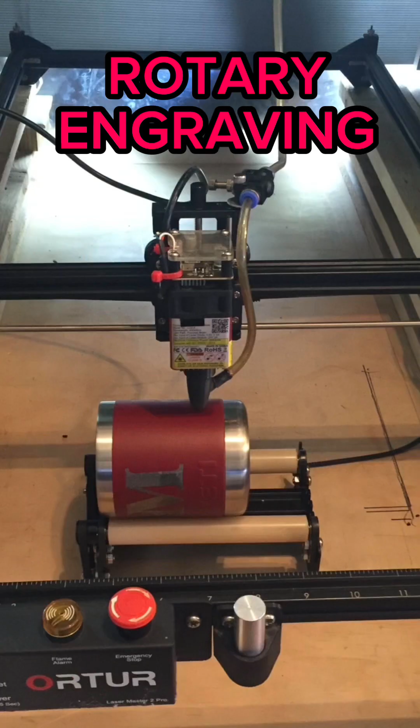Ta-da! Everybody, this is Big Bertha 1.0. You might have remembered from previous videos that I had a smaller enclosure, but I have too many machines. What a problem to have, eh? But when I'm switching them out for particular jobs, because there's particular lasers and stuff that I like to do with each and every one of them, I needed more room.

Okay, let's pause right here just for a sec. So things you need to know before buying a laser engraver. First of all, you want to make sure that they have a website. Buy direct. If you go through a third-party seller, you may not get the support that you need. And that was what I mean by after purchase support. If you have any issues, you want answers to get your machine up and running. The next thing is check to see if your manufacturer is innovative, if upgrades and accessories and tutorial videos are available for you.

Now, I realize some of you have garages that you can use, and that's great. But I'm in Canada, where our average temperature so far this week has been minus 21 degrees Celsius. Even the bunny rabbits are hopping slowly.

My husband had been squirreling away some 2x4s for quite some time, so I decided to borrow them and build myself a new table. Now, eventually, I'd like to cut out this portion and make a platform that would raise and lower, but everything's on a budget, and I need to get back to work.

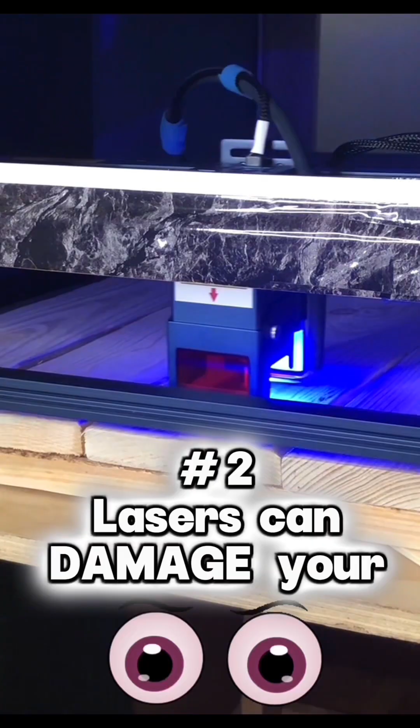So, not only do lasers stink, and you need a good exhaust system for them, they're very harmful for your eyes as well. So, make sure you have proper eye protection, which is another reason why I built a bigger enclosure, because the laser's beam reflects off of surfaces.

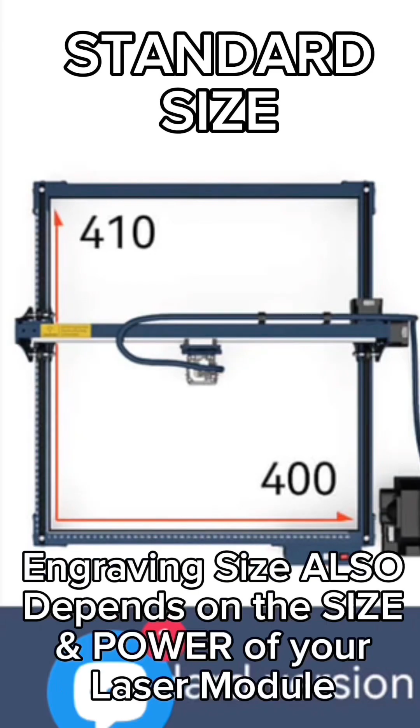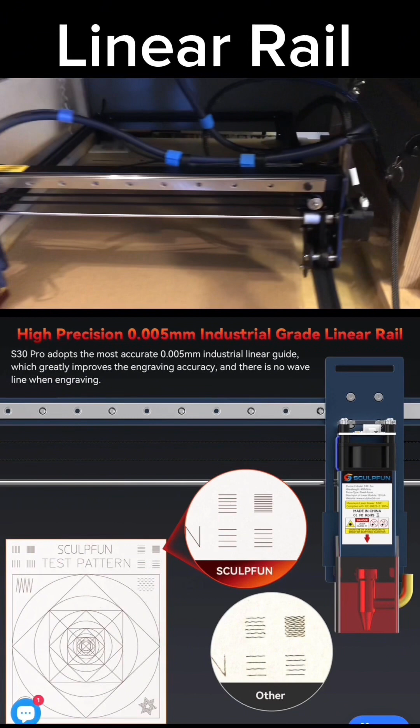Now, Sculpfun had sent me an S30 Pro 10-watt laser with the Y extensions to test out about a year ago. I'm not going to lie, this has been my main workhorse for my sign shop. I am really impressed with the linear rail system that you'll see at the very front of my machine there. With the 10-watt, beautiful, absolutely beautiful detail.

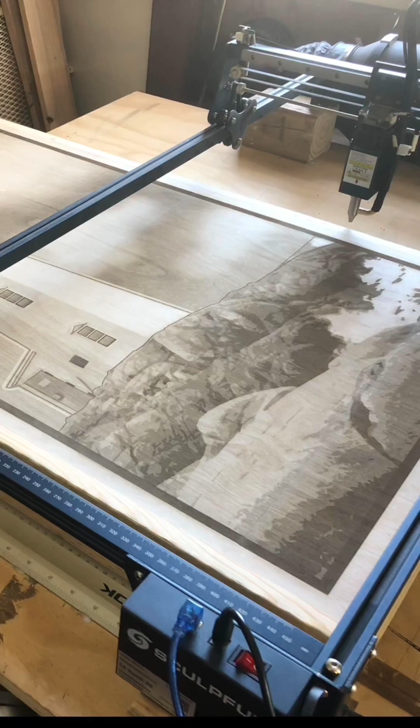So I was a little apprehensive of doing this. I added the XY extensions. So it takes up about 4 foot by 4 foot on my new table. I've just found I've been doing a lot larger projects like cornhole boards, their scoreboards, also 6-foot porch sitters, 6-foot growth charts. So for me, it really was time to extend my machine.

Now you don't have to. I did all of these, well, yes, with the Y extension, but you can do that with the smaller machines. You can check out video 37 on how to tile your artwork in order to do these larger projects.

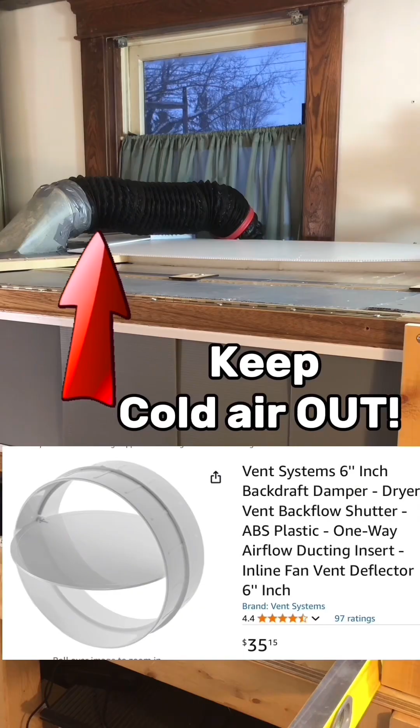So I'm using a 6-inch VIVOSUN air exhaust system, but I've also installed a backdraft damper right in here. So that keeps any of our cold northerly winds out. I have my air exhaust underneath my table, so it doesn't cause any vibration. And it's attached to a board there, and I have a dryer vent system that automatically closes, and there's also screens to keep any birds or rodents from coming into your room.

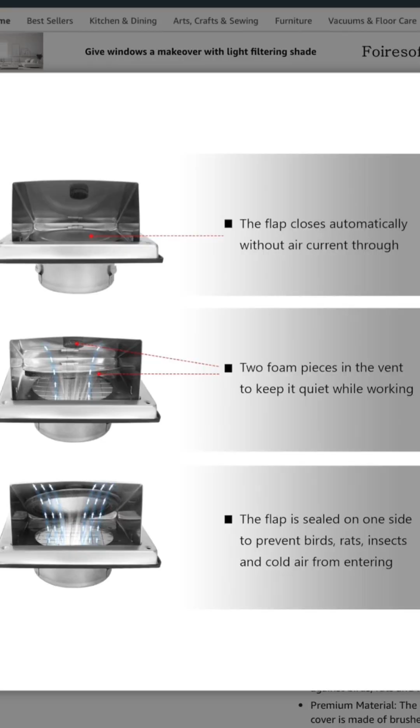So for now, I have lots of room for my extended Sculpfun, and I can switch out any machine to run simultaneously beside it. Eventually, I will have shelves underneath, and they'll each have their own enclosures, so I don't have to switch out on the top surface.

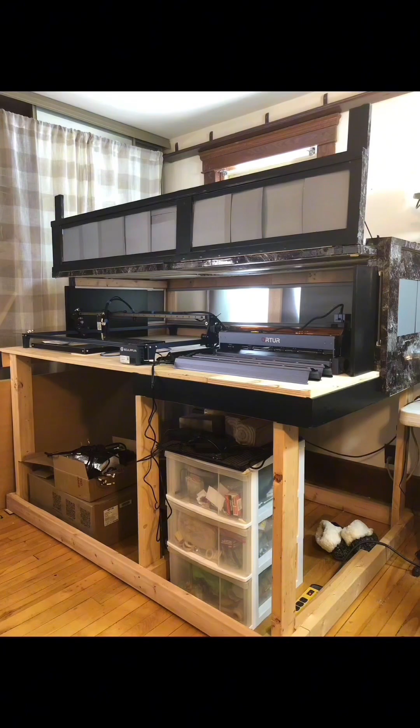So I decided to make it a little more aesthetically pleasing by wrapping it with flat black vinyl because of the laser's reflection. The very front portion will open and close, but it also slides back to give me access to put in larger materials. Same with the side panels. Now this bottom portion here allows for airflow, but I think I'm just going to use a vinyl welding curtain there, and that will give me easy access to any power switches.

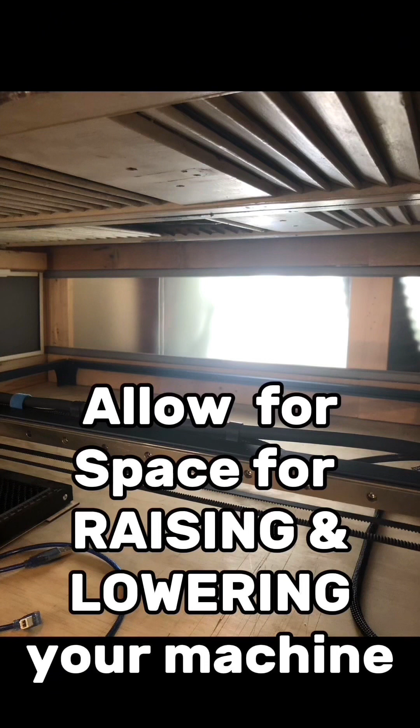So yes, any enclosure cannot be airtight. You have to allow for airflow. And I prefer my airflow to come from the front. Another important thing is to allow for easy access and to allow for raising and lowering your machine. By easy access, for example, on the back of my OLM3 is the YRR rotary switch and plug. So I'm going to need to be able to access that.

Well, I picked the carcass clean of my very first enclosure, and by using the 3mm Coroplast, which is corrugated plastic, and frosted plexiglass at the back to allow light in, I used the J-Track PVC shelf molding.

So I put that along the top and bottom of any access areas that I wanted, and then I measured what height I would have to cut these pieces at and made pieces that I could slide open and closed.

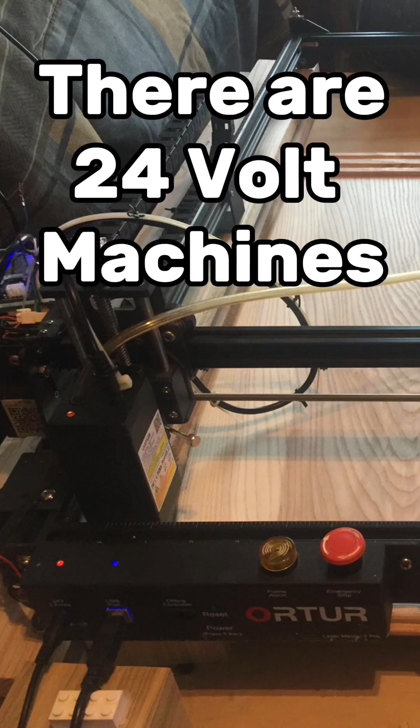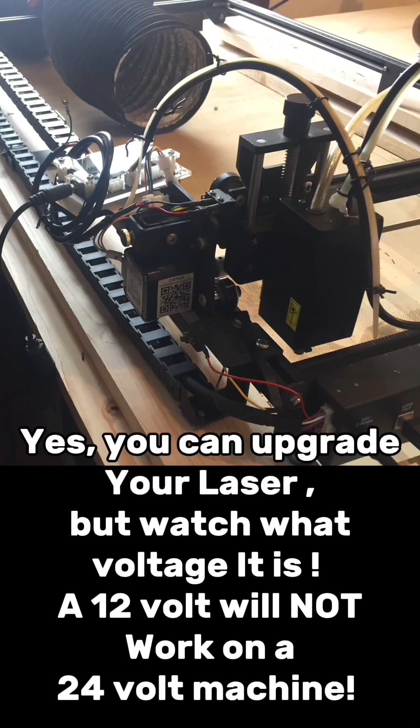Now let's move on to what else you'll need to know about laser engravers. There are 12-volt machines and there are 24-volt machines. There's lots of accessories and modules available to upgrade your machine, but some accessories only work with their brand. They're wired differently or they have different plugs. You can always upgrade your laser, but watch what voltage it is. If it's a 12 volt, it won't work on a 24 volt machine and vice versa.

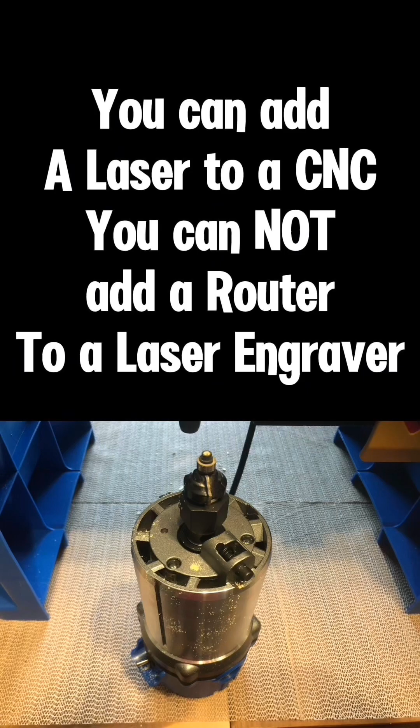You can't add a router to a laser engraver, but you can add a laser to a CNC machine. Laser engravers are just not built strong enough, and they need an automatic Z height adjuster.

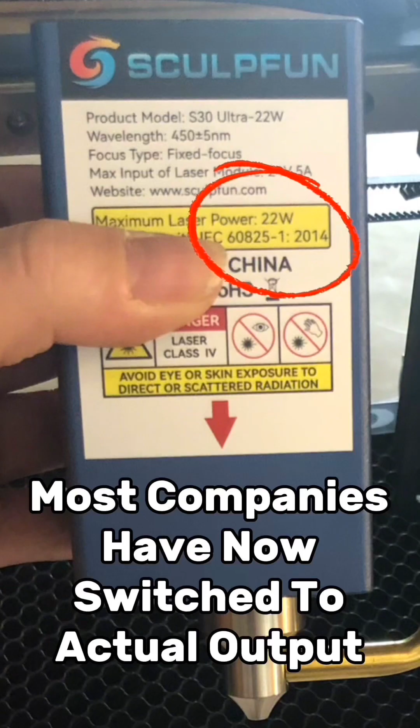Now let's go over laser modules so you guys do not get ripped off. Most companies have now switched to the actual output, but some companies have not, so beware. Some that they advertise as 20 watts are only 1.6 watts, and some that they advertise at 40 watts are only 5.5 output. So it's the output that you're looking for.

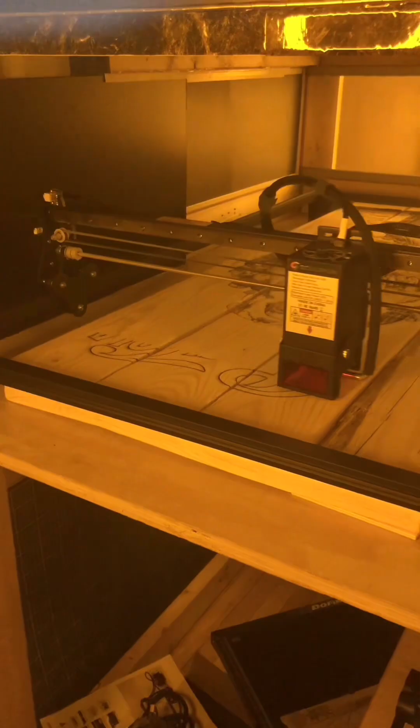Most lasers now boast an engraving speed of about 20,000 millimeters per minute. I've never gone that fast. The fastest I've gone, I think, is 6,000 millimeters per minute. It depends on the type of laser, the power that you have, and the type of material that you have. So don't expect that you're going to be going at 20,000 millimeters a minute right out of the gate.

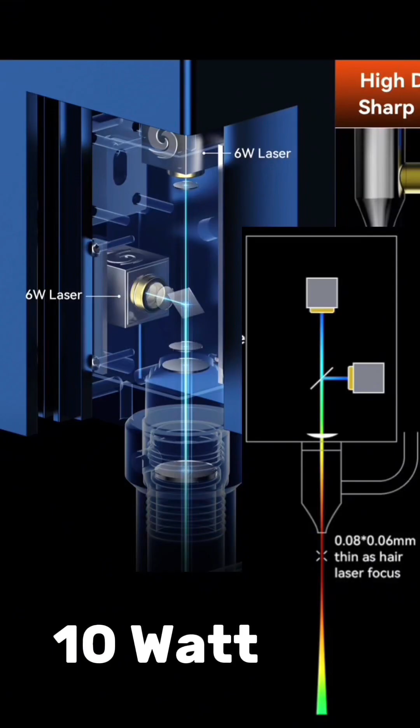Now, this should be included in your laser specifications. For example, a 10 watt has 2 laser modules in it that uses a mirror to focus it into one laser beam. And it should also have the laser focus measurements.

The most common lasers now for sale you'll see are 20 watt and 22 watt, which have 4 laser modules and a mirror to focus that beam. Every time you go up in size, you'll also get a bigger laser beam, which can affect your finer detail. So make sure you're checking what the focal point of that beam is.

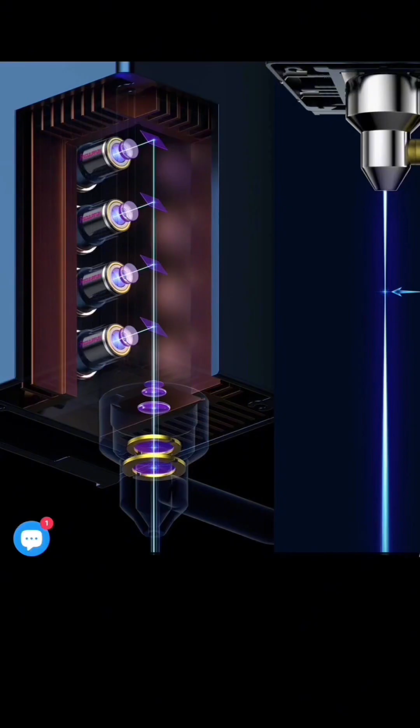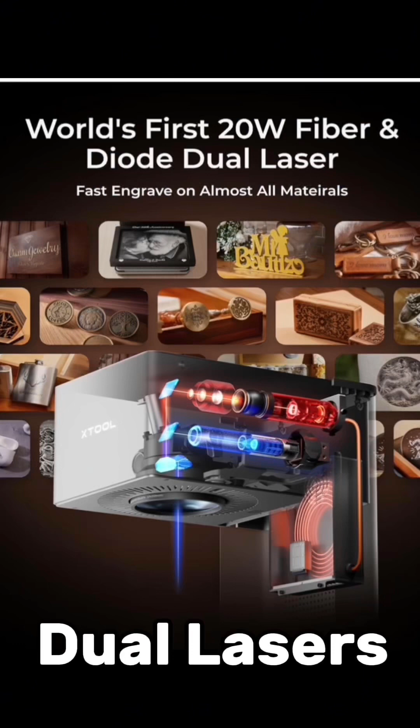Right now is a great time to get a 10 watt machine or a 20 watt machine because they're innovating these lasers all the time. You can get dual power lasers that you can switch from a 20 watt to a 40 watt, or dual lasers with infrared on them as well. Infrareds are used for high-speed marking of metals or plastic, but they can't really cut. So a lot of companies have added infrared lasers that you can add to your machines as well, so you can switch out.

Now, if you're looking for something for higher speed cutting, you may be looking for a CO2 machine. It will engrave much faster than a diode and be able to cut through thicker materials, but it comes with a hefty price tag, and you'll probably have to invest in a water chiller and a few other things. Because CO2 machines come fully enclosed, you may be limited on the size of the material that you want to do.

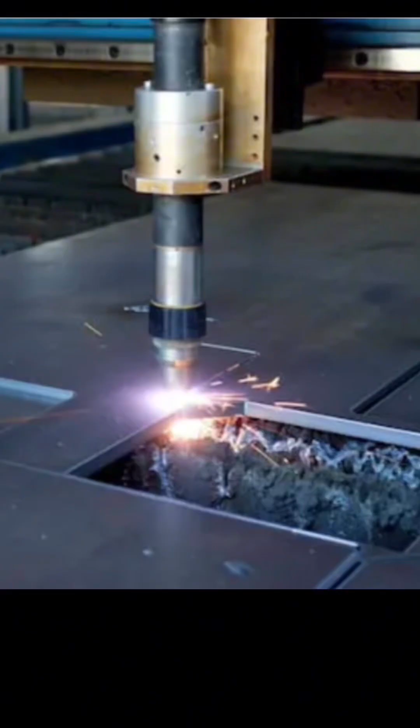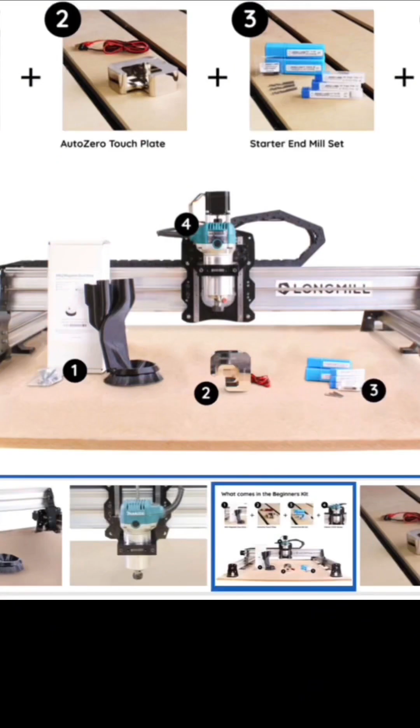If you're looking to be able to cut thick metals, then you'll want to look up plasma cutters. If you're wanting to do deep scoring or cutting very thick material, you're going to be looking for a CNC, which houses a router. So if you decide to go up in power, remember your laser modules are going to get larger as well, so you're going to lose some of that engraving space that you had before.

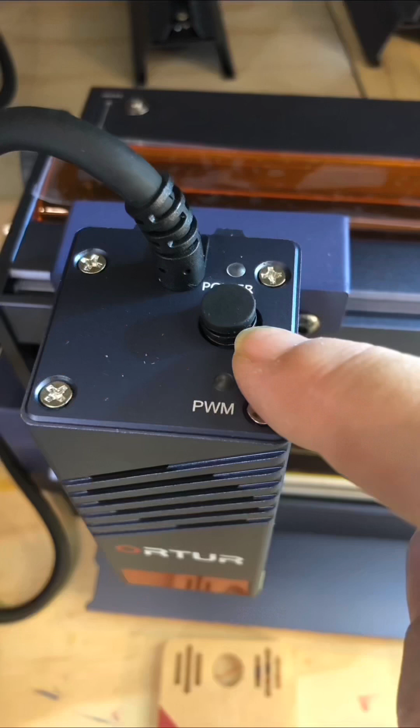So I'm actually upgrading my 12-volt machine to a 24-volt machine. I'm going from a 4-pin plug-in to an MR30 3-pin plug-in. Not all lasers are built the same. Don't think you can get an off-brand and plug it into your machine. You've got to do your research. And this is a whole other type of power plug to a laser module.

And if I pull this rubber cap here, that's the integrated air assist. We're going to go over what air assist is now. I attach an air line to this module by removing this rubber plug, pressing down with 2 fingers and pushing in the air line, and it will lock in place.

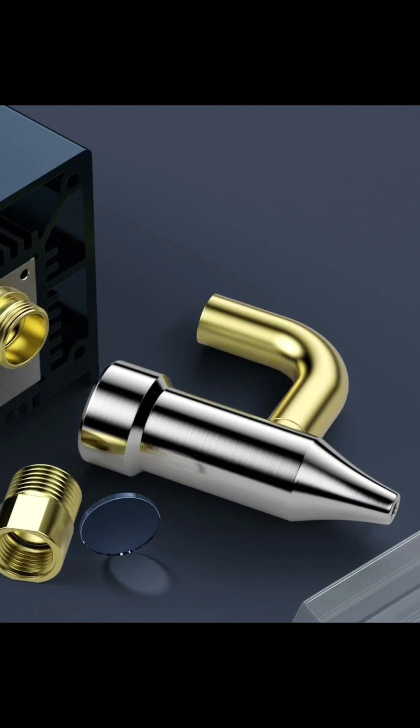Air assist comes pretty standard on laser modules and machines now, but if yours didn't, you are able to buy the tips and modify it yourself to add an airline. Just make sure that any tip you order isn't longer than your focusing tool.

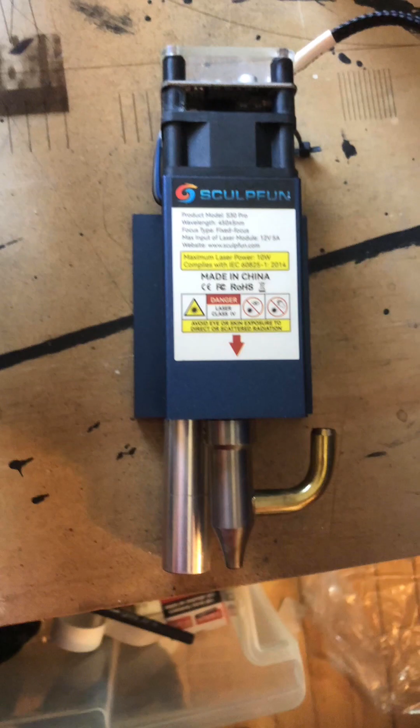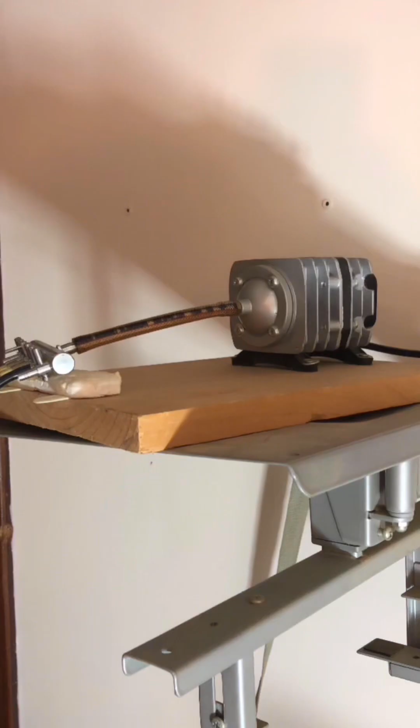So if your machine does not come with a pump, you're going to have to purchase one. And I actually have the aquarium pump, and it came with the splitter regulator manifold that I could do it to a number of machines. And I keep it up and raised off of the table so it doesn't cause any vibration. So you don't want your air pump on your table. It can cause shock sensors to go off or alarms on your machine, and it will stop engraving midway through a project.

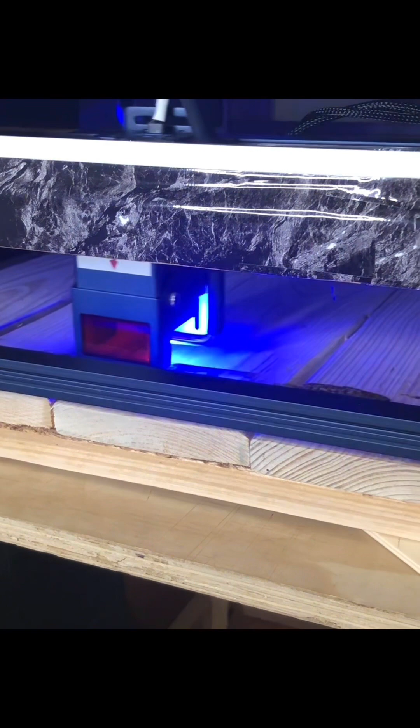I thought I'd share just exactly how loud it can be with the air exhaust, the air assist, and the air fan of the laser module itself. The fan on your laser module itself, its main purpose is to keep your laser cool. So air assist is actually going to help prevent a lot of soot and residue buildup inside the laser module and dirtying your lens.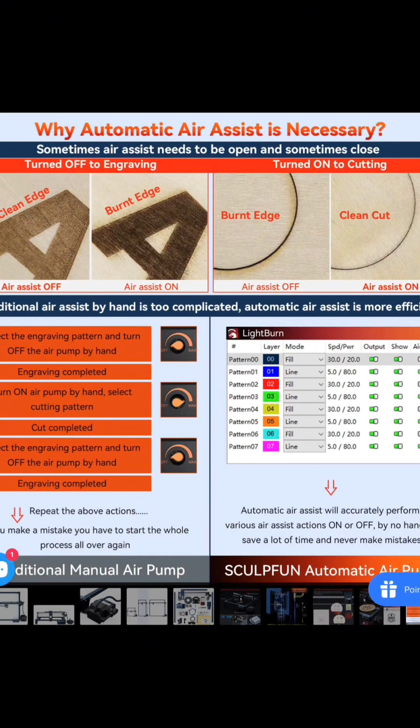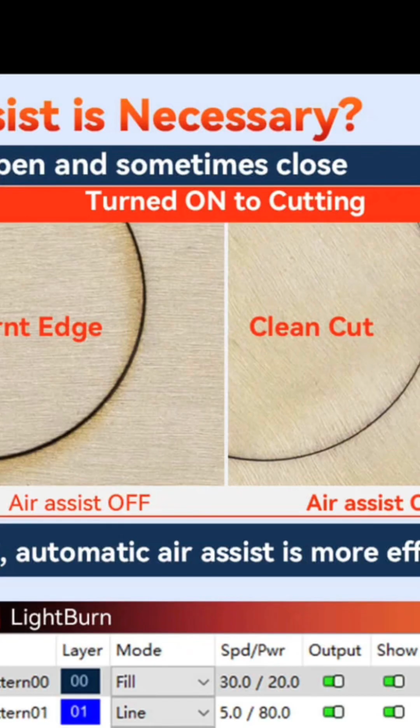Some manufacturers suggest having air assist off when you're engraving and having it on when you're cutting. I actually have it on all the time when I'm engraving and when I'm cutting. Now, I like to do deep and dark engravings. Okay, so the air assist is going to help keep that soot from building up on the tip while I'm engraving. It's also going to move the soot out of the way on the material.

If you plan on doing MDF, it's the worst material you could ever do, but there's a lot of soot and smoke generated by it. So that's again why you're using an air exhaust to take out the smoke, because smoke can defocus a laser.

Charring and scorching is actually controlled with the power of the laser, at what power you are engraving or cutting at, or the amount of passes that you're using. For example, I went at 2000 millimeters per minute at 95% power of my 10-watt module. And that's just showing that with a little bit of sanding, you can get rid of that charring and scorching, and it'll bring out the detail of your engravings even better.

So I like to sand with an orbital sander and with 120 grit sandpaper, or even sometimes 220 grit sandpaper, about half speed, because you don't want to take too much of your top layer off. And then I like to just give that a little blowout with my air compressor and little gun there.

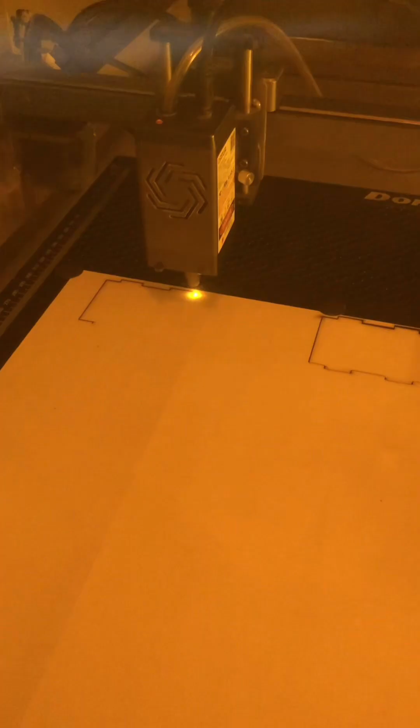Air assist is crucial if you're going to do cutting, because you are using a constant power mode of your laser module for cutting. The air assist is going to actually help snuff out any possible fires and allows airflow for cleaner cuts, but never, ever leave your laser unattended. Now here I'm showing you a honeycomb board and my material is fastened down. I have another video all on cutting. We won't get into too much of that today.

And air assist is crucial to make sure your lenses stay clean. Some lasers actually have two lenses. One's located at the bottom of the laser module, and some come with dust lenses that are integrated into your air assist nozzle. You're going to need to clean your laser lenses often, especially after a big engraving job, before a big engraving job, or before cutting.

You're going to see less power from your laser because of the soot buildup on the lens or even in the fan. So you can actually use an air can to blow out your laser module itself. You want to keep that nice and clean and keep it from overheating.

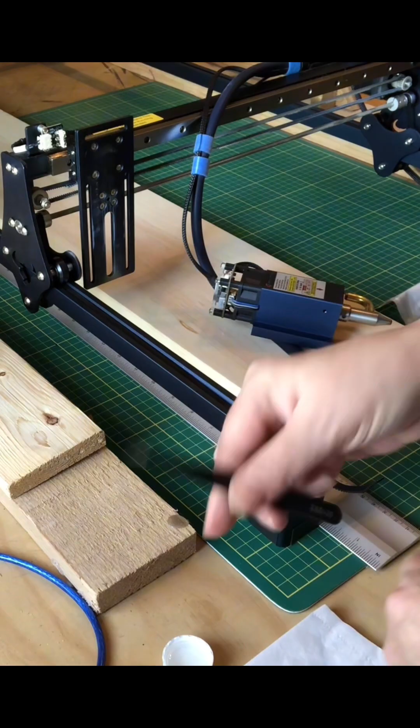Most lasers come with extra lenses right now or extra dust lenses, and you'll get gaskets as well. Now, I do suggest ordering extra to have on hand. If there's a speck of dirt on your laser lens or you haven't cleaned the soot off properly, you're not allowing the laser beam to go through the lens properly, and it can crack your lens. So you may have a long wait from overseas, and then you're going to have too long a downtime.

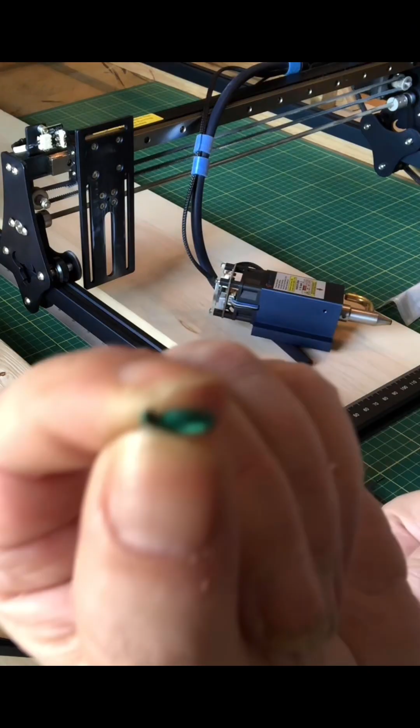And I'm just showing you here that I fried one of my gaskets that covers one of my dust lenses in the air assist nozzle itself. It decided to flip up as I was twisting the nozzle back on. So it blocked the laser lens. I didn't have any laser coming through at all. And then there was a big flash of light because it fried my gasket there. So take care when you're reassembling your laser.

So I am going to speed up this part here. So you'll use their little tool just to loosen off that screw. And that's what really holds it on. When you twist it back on, you're not going to twist it super tight because you don't want to squish that green gasket.

Okay, so you'll just do it to where the air line needs to be on the right hand side. Okay, not super tight. And then you'll use that screw to tighten it. So here's the bottom lens of the module. So the kit comes with a wrench to be able to take that off.

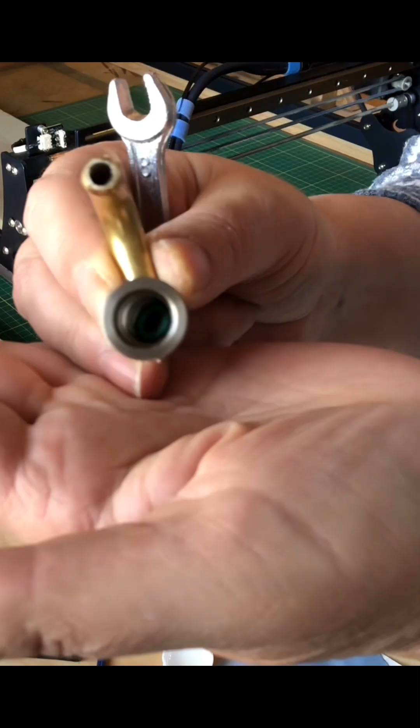I'm going to remove this piece here. So this is what I classify as a piece for the air nozzle. It has the dust lens inside of it. And then there's a lens at the bottom of the laser itself. And in here is where that pesky little green gasket has to sit to give an airtight seal. So when it flipped up and blocked the laser beam, it actually burnt through the gasket and actually burnt my dust lens. So it cost me a dust lens as well.

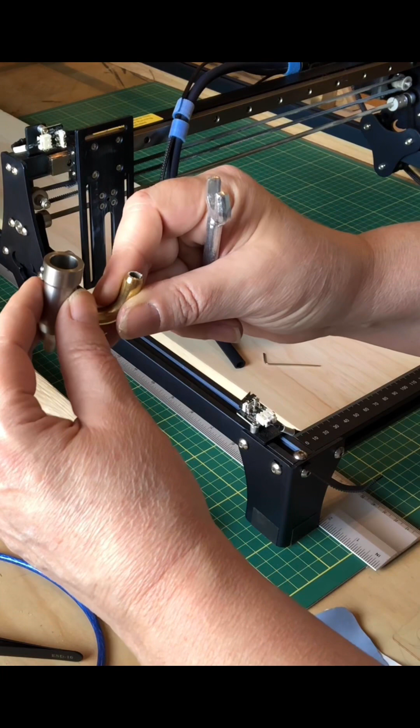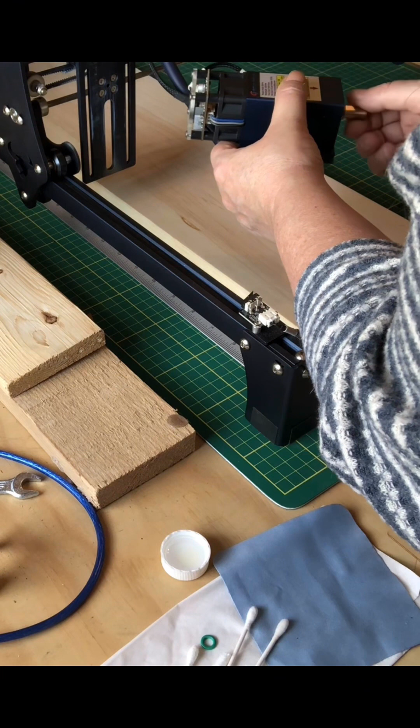So take your time. I've taken some rubbing alcohol and poured it into the cap. And now I'm just going to take a Q-tip, dip that into the rubbing alcohol, and using the tip with the rubbing alcohol, wipe both sides of the lenses, and then take the clean, dry tip and gently wipe any residue. Okay, so do both sides and then do the bottom of the laser and make sure to clean out the nozzle as well. It may have some soot buildup.

Now you hardly saw any residue on the Q-tip of the lens that I cleaned, but look what I pull out of the air assist nozzle itself. So that's why air assist is crucial. It's going to keep your lenses clean and it's going to extend the life of your laser module. So make sure you get that little green gasket sitting flat. Maybe take some tweezers if you have to make sure that that is in there perfectly flat.

And then holding the laser upright. Okay, if it slips on you a little bit, just start again. Make sure the gasket's still in the same spot. Okay, so you're just going to screw that on until you start to feel it slightly tighten. I'm not doing it very tight at all because we don't want to squish that gasket. And then you're going to feel where it wants to stop on its own.

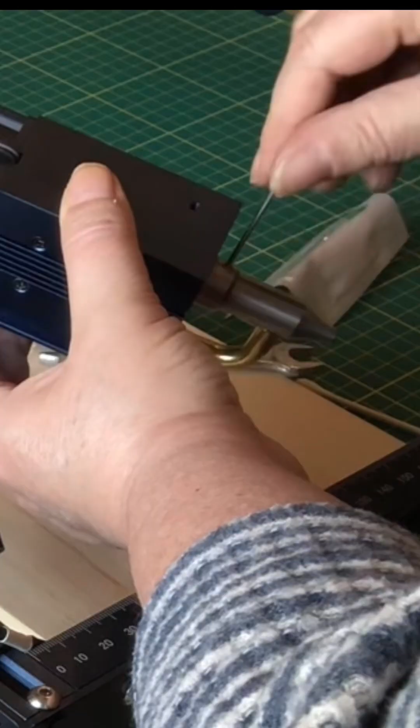So it still may be a little loose, but we're just going to take that nozzle to the right-hand side. Okay, so it's going to be the fixing screw that goes to the left-hand side of that nozzle that really holds it into place tightly. And tighten that all up, and you're all good to go to put it back on your laser machine.

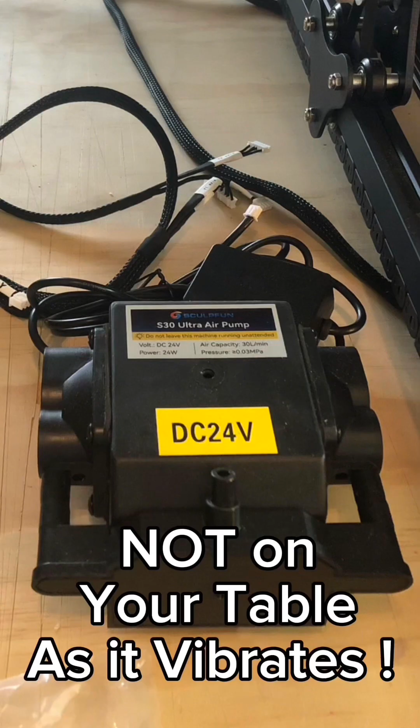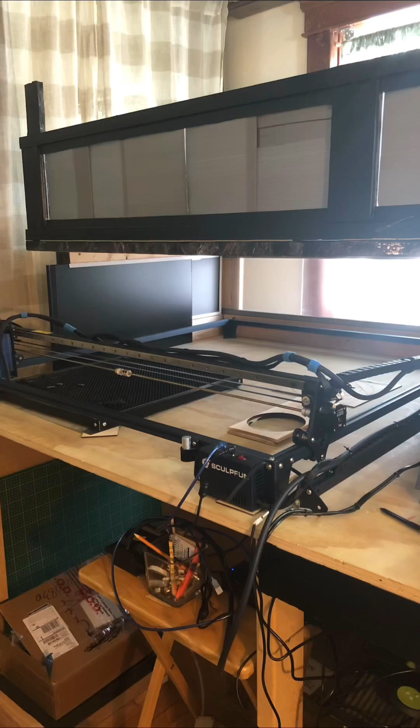You are going to need a computer to run your laser engravers. They just don't magically work on their own. Now I'm using a desktop computer. Now allow for ample airflow so your desktop computer does not overheat. A laptop might work, it does for some people, but it might not have enough processing speed or memory for the programs that you're going to need.

And good practice is to make sure it's on a separate outlet from your laser engraver. And your laser engraver is not plugged into the same outlet that you have your air exhaust or your air pump on. It can cause interference, which might show up in random lines in your engraving.

So eventually I am going to install an 8-inch exhaust fan, but right now the 6-inch is plenty enough. So just a little note there, it is cheaper to buy the whole kit: the air exhaust, the dryer vent hose, and the air scrubber comes as a complete kit.

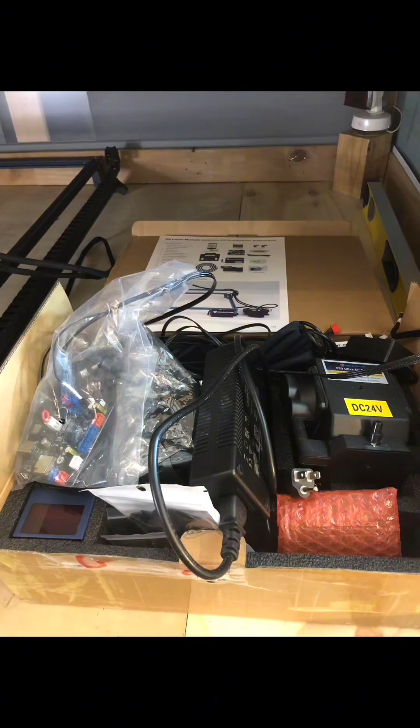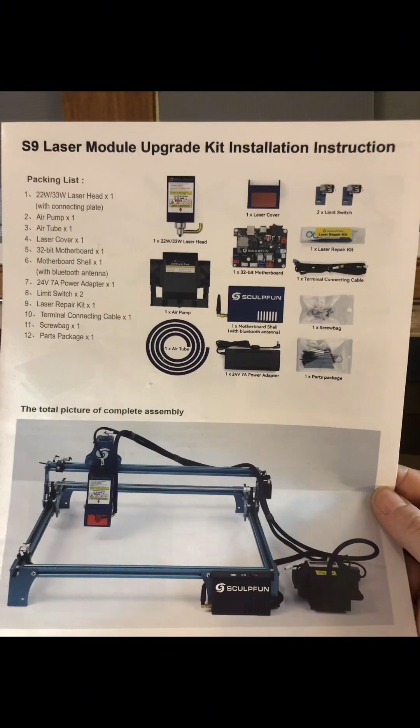Now, if you go on the SculpFun site, I purchased the 22-watt Ultra upgrade to take my machine from a 12-volt to a 24-volt so it would run a 22-watt laser, and they sent me an S9 Ultra upgrade kit. So that's how it comes, but they have it advertised for the S30 series. Well, the cord is not even near long enough to work with your XY extension kit.

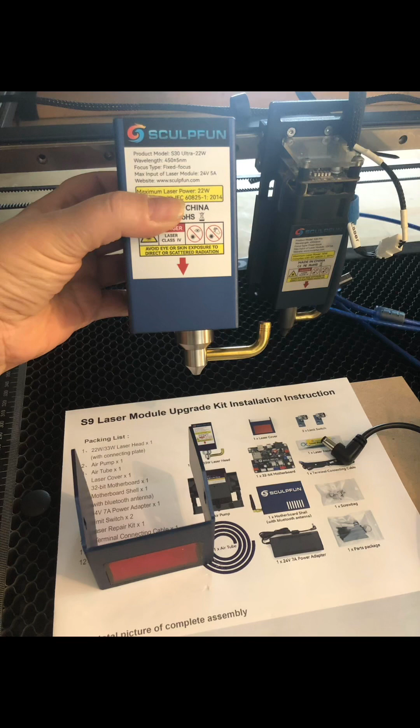Okay, plus it came with a 4-pin plug, the original S30 XY extension kit, and I needed the 3-prong plug. So I guess SculpFun has realized a lot of people are making this mistake, so they have added a wiring harness to their website.

And even though the pictures don't change from the 4-pin harness, they will send you the proper one with the S30 plug. So this is the upgraded motherboard, and it will take a machine to wireless, although I suggest always using a USB connection in case your Wi-Fi goes down mid-engraving.

They've also improved the air pump plug so that you can run it with, say, LightBurn or LaserGRBL and be able to turn it on and off through that program. And I explain how to do that in my video number 32. So here's the motherboard. It's nicely color-coded, so you really can't screw up plugging anything in.

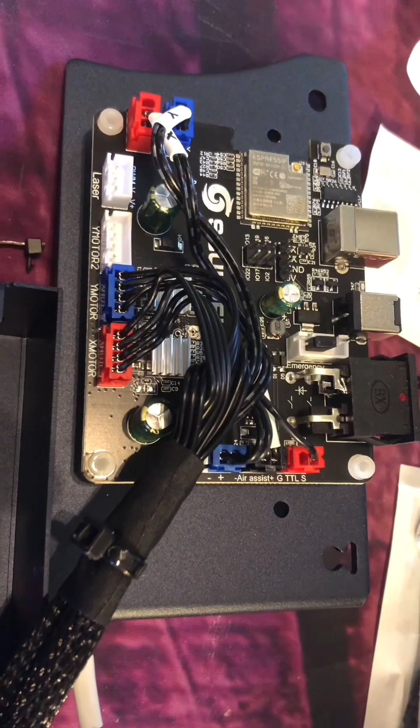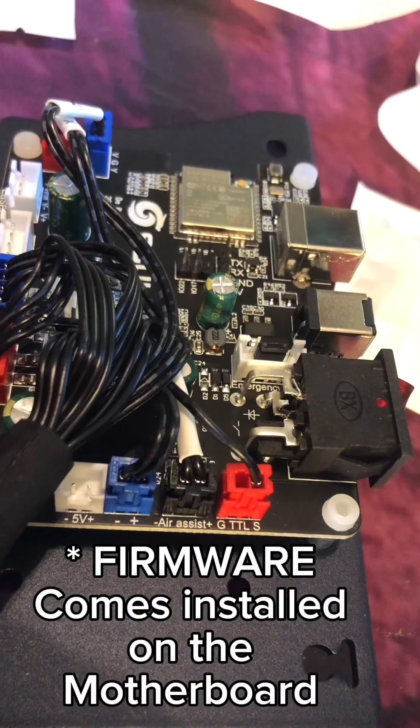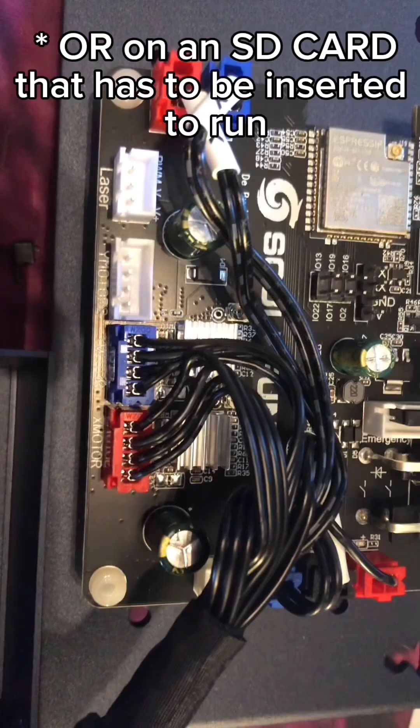Firmware comes installed on the motherboard. Firmware is what's going to run your machine. Okay? Some machines have an SD card that the firmware is installed on, and it has to be installed in the machine to run, but not on this SculpFun. Now, if you're having a problem with your motherboard or your machine doing some things, sometimes support might suggest to update your firmware. So this is what the firmware is talking about, not updating the software or any programs. This is where your firmware is.

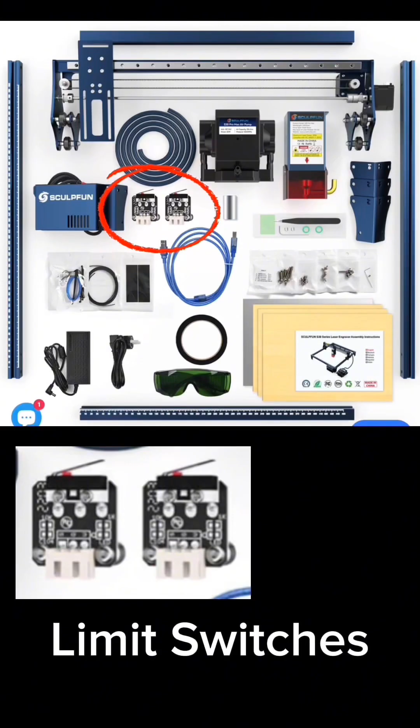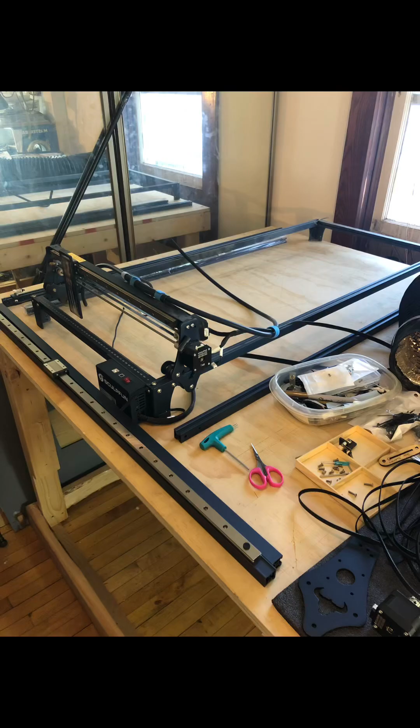So I'm recommending that you look for a machine that has a USB connection, but also comes with limit switches. Okay, so this is considered an open rail laser machine, and there is a limit switch at the X and Y positions. So this will home your machine accurately each and every time, which is crucial for repeat jobs, batch jobs, doing more than one cutting pass. Okay, limit switches, awesome.

Now there's lots of videos out there on how to assemble your machine. Make sure you're going to your manufacturer's site for their actual tutorial videos. And I'm going to tell you what they kind of leave out. If you expect precision out of your machine, then you're going to have to be precise when you're building it. So make sure your table is level. After your build, make sure your laser machine is level.

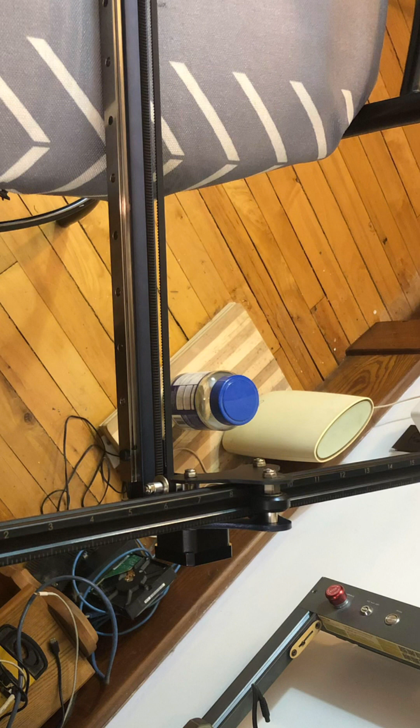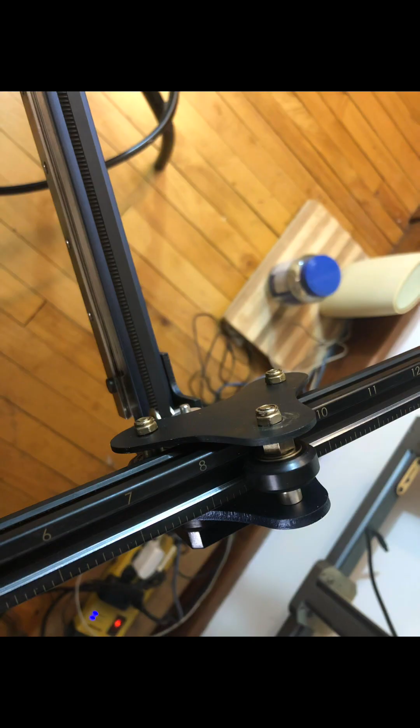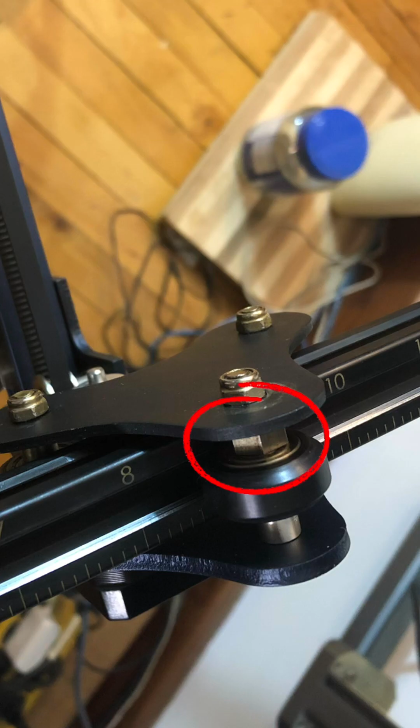Before building it all, test out your gantry with one of the rails to make sure it will slide through seamlessly, that the wheels are lining up to the V groove in the 2020 rails. Now this is the bottom view of the gantry, so this is why it's easier to do this before fully assembling to make sure it's running smoothly. If it's not, then you adjust this eccentric nut on the bottom.

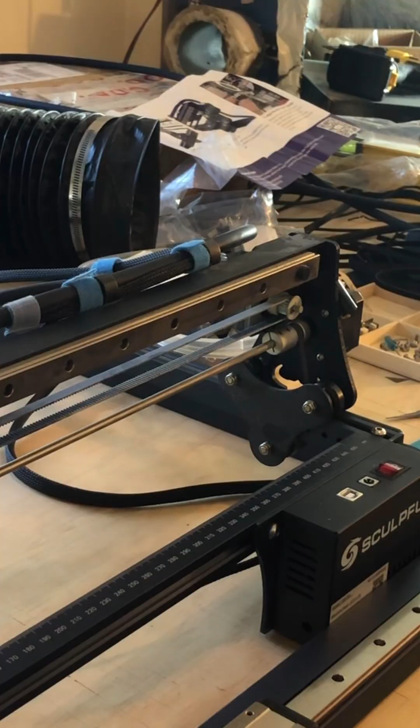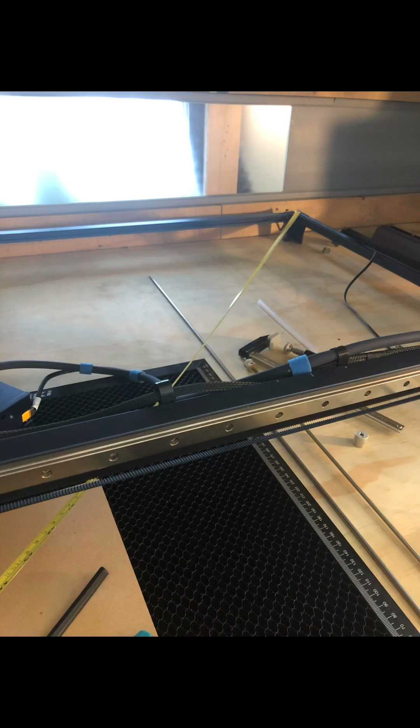Make sure your X rails are the same size, line them up together, and make sure your Y rails are the same size before you assemble the whole machine. Now you're not going to tighten those screws yet. Okay, you're basically going to put it together. Do not tighten these tight, because the first thing you need to do is to make sure your machine is square. And to check that, you measure corner to corner.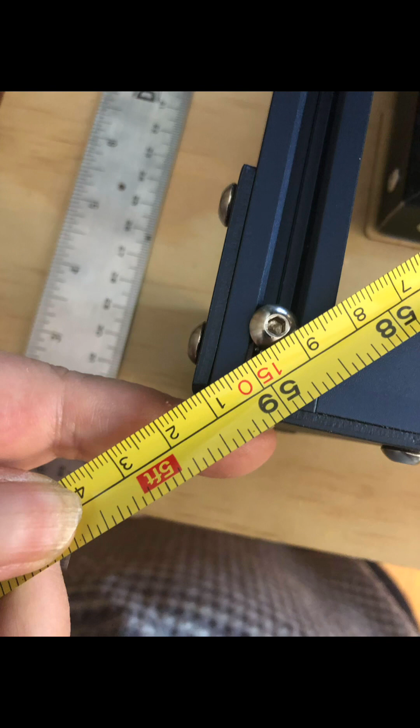So the first time I built it with the XY extension, I was actually 4 millimeters out. Tore the machine apart, realized that the back rail was about 1 millimeter shorter than the front rail. So I added a washer to the back inside of the rail to make them an even length. Installing the limit switches, the laser module, and cords are the very last thing you should do.

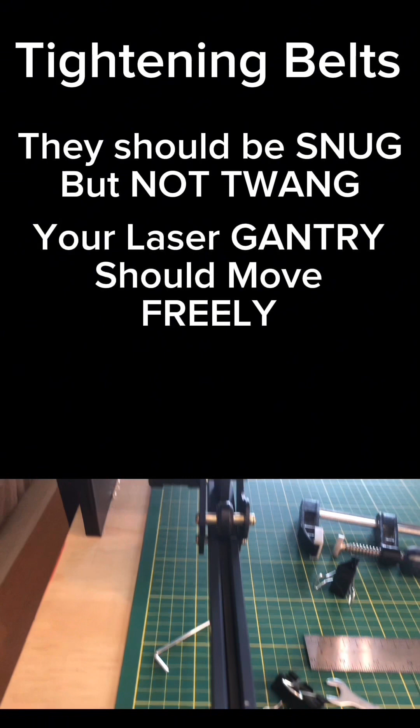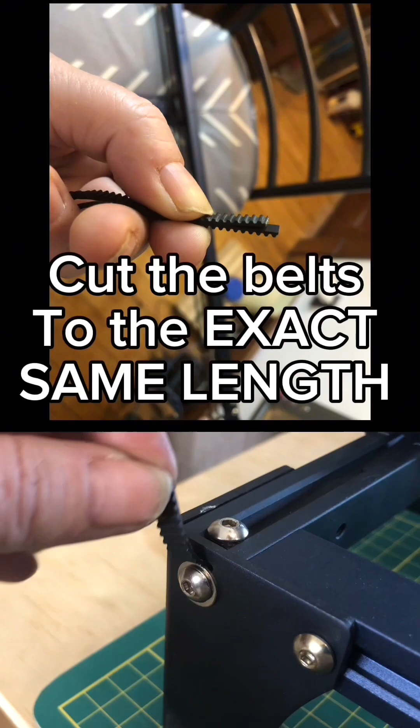Now this is probably the most difficult part of assembling your laser, making sure the gantry runs and comes home parallel. So we're going to go over tightening belts. They should be snug but not twang, and your laser gantry should move freely. If it's too tight, you're going to burn out your stepper motor. So I added washers to the front and back, and I cut the belts to the exact same length.

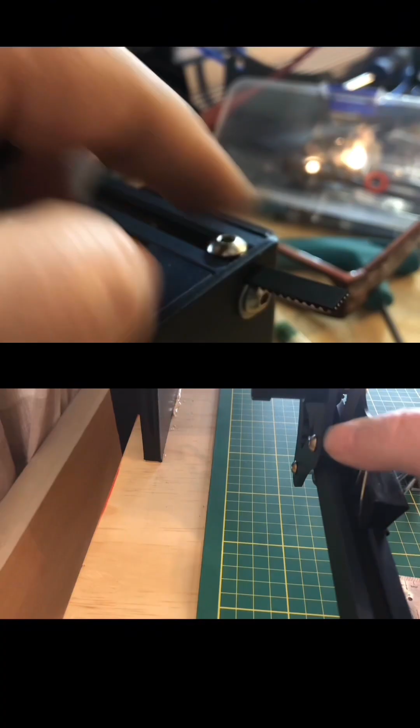I even counted the amount of teeth to make sure they were even on each side of what was coming out the back of my laser engraver. Using a white Stabilo pencil, I measured both left and right hand sides for a precise measurement. Using a ruler, I would hold that up to the measurement and just bring it to where the wheel was touching that tick mark on both sides.

And then I clamped them in place. So I found the binder clips worked better than the bigger clamps. Just be careful. Sometimes they like to fly off. Now that your laser gantry is secured, you can tighten your front belts. And I ended up with the same amount of teeth coming out the very front. So I knew my gantry and the stepper motors were lined up exactly to the same set of teeth.

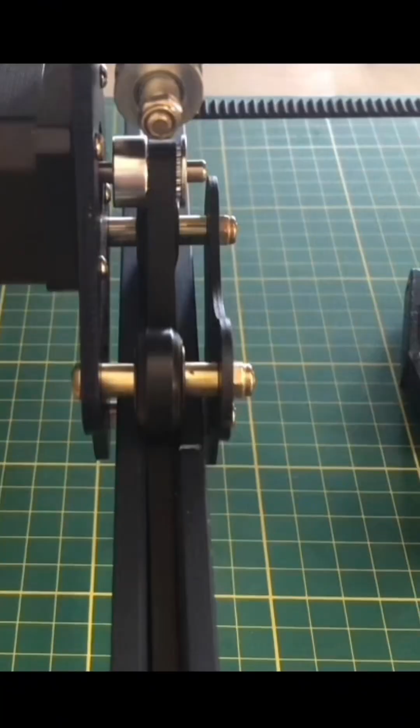So it will run parallel each and every time, coming home, right and left, lining up perfectly. So if you're engraving and cutting and your designs are going skewed, your circles aren't round, this could very well be your problem, that your gantry is not running parallel.

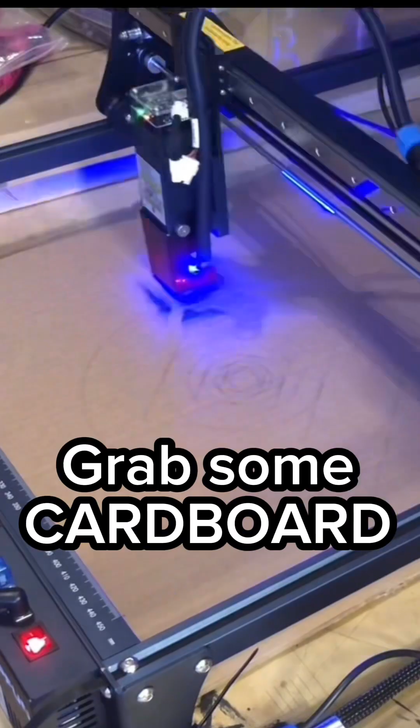Now, the very first thing you should do with your laser, and we're going to go over focusing in a second, is run a line accuracy test. Okay, that's going to tell you how your belts are, if your machine is square, and if your gantry is running parallel. So I don't trust my eyes. I have a slight astigmatism in my eyes, so circles kind of look a little oval to me. So with the line accuracy test, use a ruler as well. You're going to see just exactly how accurate it is.

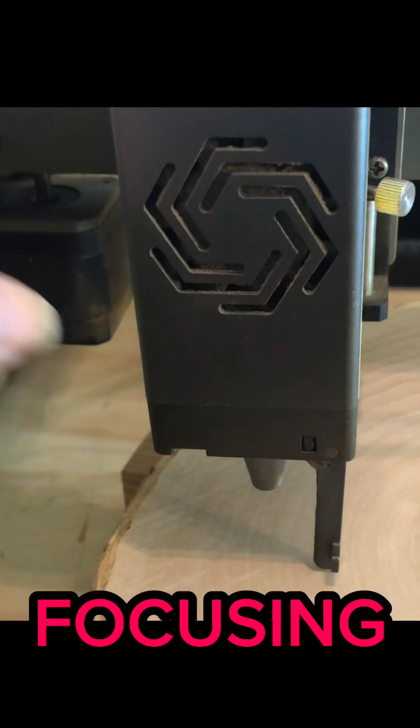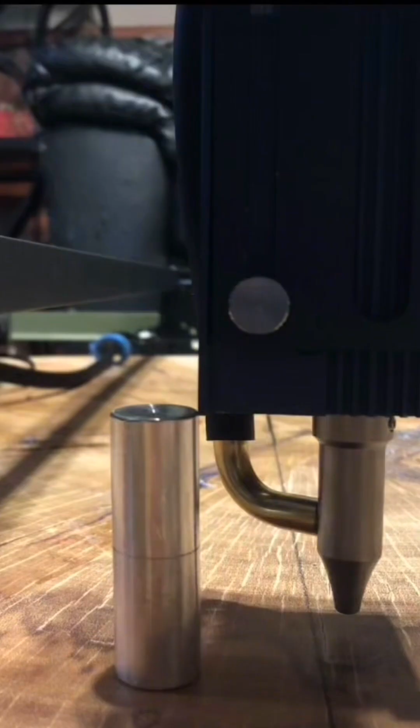And pinpoint precision depends on your focusing. So some lasers have kickstands, some come with plastic cards, and some come with aluminum focusing tools. So you'll either lower your laser just so it touches your focusing tool, or if you're using a kickstand, just as it touches the material. But don't focus just in one area.

Okay, your material may have a little warp to it, or if you're using live edge, of course, it's not going to be completely even. You need to focus in a number of spots. For instance, this is a very long board, so I am going to focus front and back, left and right. Now, make sure your machine is turned off if you're moving the gantry like this to do this.

Now, with the XY extension, I don't suggest doing this at all. Okay, your machine needs to be powered off. You need to do it slowly so you don't cause any electrical charge and you're not frying your motherboard. Now, with this particular board, I was a little low to the back, so I will just readjust that.

I'm not going to tighten the laser. I'm just going to take a little piece of wood to wedge up the front of it to bring the front of the board up a little bit so that I have a nice even focus all the way along the board while I'm engraving. And this is crucial to do if you plan on doing any cutting, and use a honeycomb board to secure your material and make sure it's level as well.

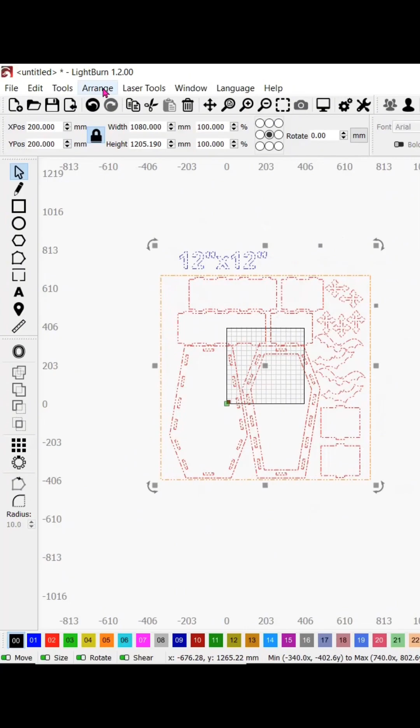Now we're finally to software. Okay, so you need a software to run your laser machine, and a very popular one is LightBurn. So you can get a free trial for 30 days. But at the time of this video, it was $99 US for a license to be able to use it. So the advantages of LightBurn is you can design right into it. So if you don't have design programs, you can use LightBurn. You can design in layers, and you can give those different layers different properties.

Now, it didn't work well for me. That's not saying that it won't work well for you, and the LightBurn forum and their techs are super helpful. But I do very large engravings and very time-consuming engravings, so I went with LaserGRBL. LaserGRBL is completely free to download and use on your computer. I found it very easy to use.

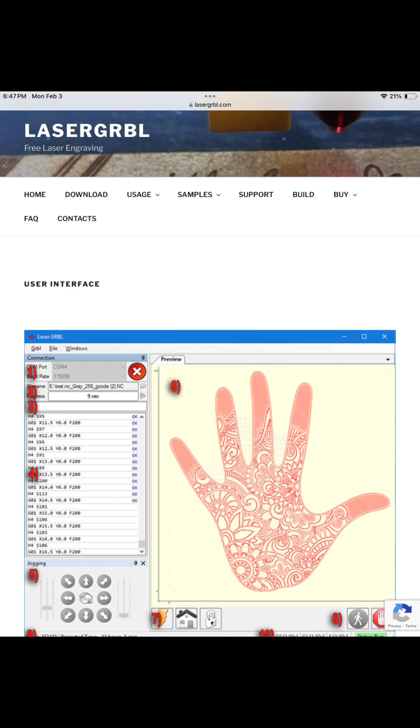Now, I've had a sign shop, so I had a lot of design programs already, because you can't design right in LaserGRBL. You need design programs. And what I mean by programs is like CorelDRAW, SignMate. A lot of people use Inkscape, which is free as well. Photo editing software like GIMP is free as well. I will be going over designs in videos, but basically in my design programs I already had, I would just export as PNGs into LaserGRBL, and away I went.

So I hope I haven't scared you, because you can create some beautiful things with your laser engraver, and I like to hand paint a lot of my laser engravings. So yes, you can create some beautiful things. You just need to do some research.

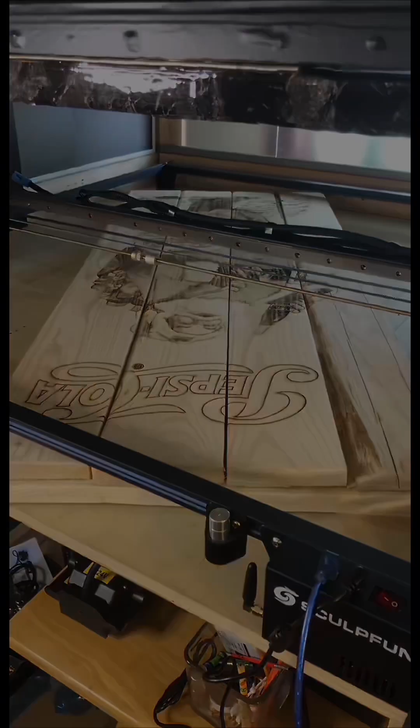So finally, after my XY extension and my 22-watt upgrade, I'm finally back to work. Not without some difficulties with the XY extension, and I'm going to share that in a whole other video, because this one's starting to get a little long. But this was my very first project off of that, and I'm very happy how that turned out.

So I hope you found this video helpful, and I hope it inspires you. Now go create!